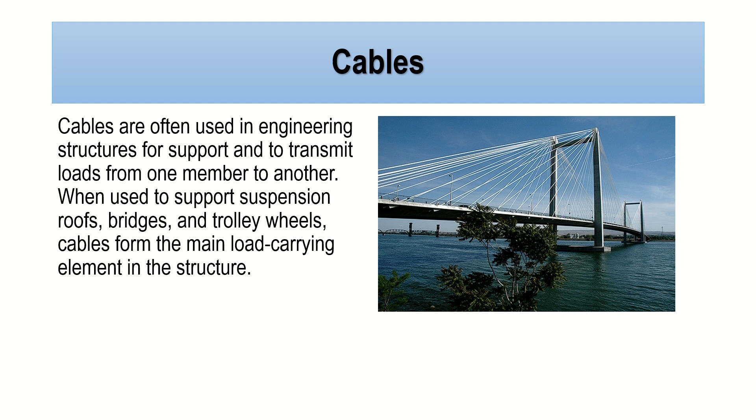So we have two types of cables. What are these two types? First, cable subjected to concentrated loading, and second, cable subjected to uniform loading. What's the difference between the two? As the name states, cable subjected to concentrated loading is subjected to concentrated forces.

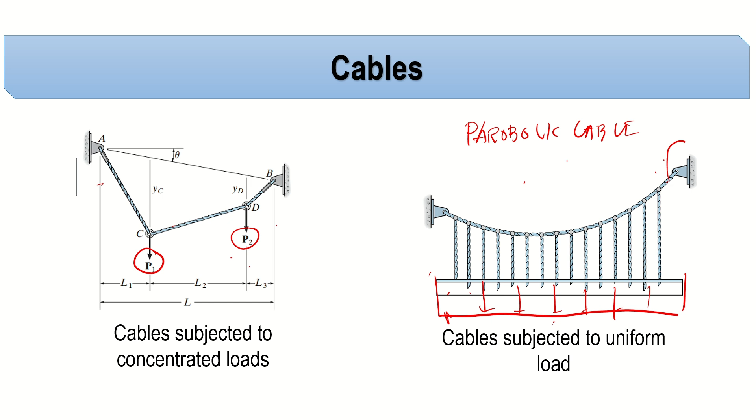But for this one, let's focus first on concentrated loading and uniform loading. By the way, before I move on, this type of cable is also called a parabolic cable. We'll discuss parabolic cable later in the continuity of our lecture.

Okay, so now what do we need to remember here? It says when L1, L2, and L3 and loads P1 and P2 are known, then the problem has 9 unknowns consisting of tension in each of the 3 segments, the 4 components of reaction A and B, and the sags YC and YD at the 2 points C and D.

So we're done with determinacy. Probably we now know what the unknowns are in the structure. For example, we are going to find what the unknowns are in this one. What are the unknowns here? We have a pin support, so there are two unknowns there because of X and Y - AY and AX. Here we have BY and BX, so there are also two unknowns there.

Aside from that, we also have unknowns for tension - tension at AC, tension at CD, and tension at BD. And aside from that, we also have another unknown, which is YC and YD. So that's 4 unknowns based on the reactions and 3 unknowns based on each segment of the cable, that would be 7 unknowns, right? Plus another 2 unknowns, which is the sag at each point, point C and point D, for a total of 9 unknowns.

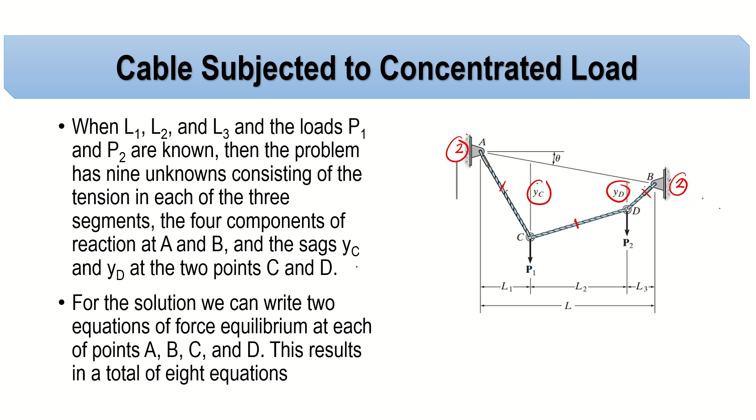And it says for the solution, we can write 2 equations of force equilibrium on each of the points A, B, C, and D. This results in a total of 8 equations. That means we can provide 2 equations at each joint of the cable.

Ano ba yung 2 equation na sinasabi niya? Yun yung summation forces X, summation forces Y. So kaya daw natin yan ma-produce in each joint. So ngayon, ilang joint ba meron tayo? A, C, D, B. 4 joints times 2, that's 8. E 9 yung unknowns natin.

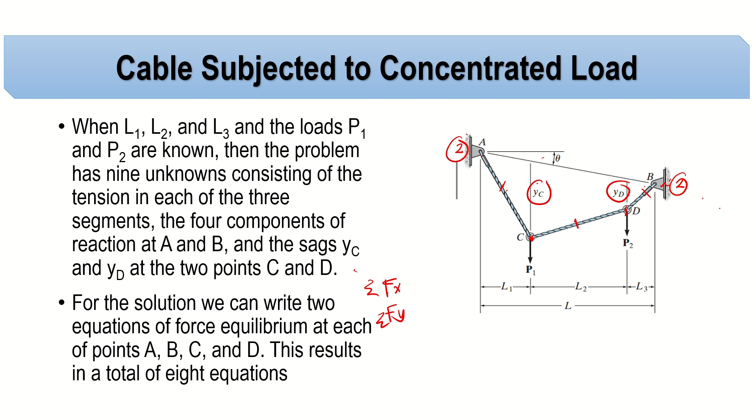Saan manggagaling yung isa pang equation that we need in order to solve this cable system? So sabi dito, to complete the solution, it will be necessary to know something about the geometry of the cable in order to obtain the necessary ninth equation. So hindi lang pala yung method of joint yung kailangan nating alamin dito. Pati yung geometry, actually most specifically yung trigonometry ng cable para ma-solve natin yung other unknowns, para makapag-compute tayo ng another equation.

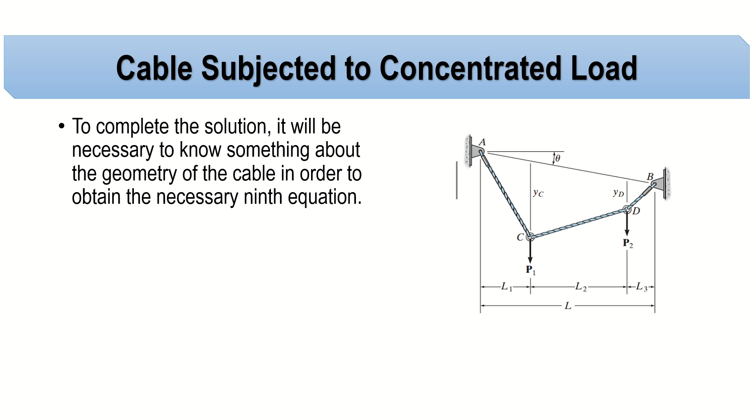Okay, in solving cables, we have key principles that we need to consider or memorize. Ano ba yung natin, key principle? So number 1, always subjected to tension. Yung cable, like I said earlier, cables are always subjected to tension. It doesn't have any capacity in compression at all.

Number 2, maximum tension occurs in the higher support. For example, we have a problem, tapos ito yung figure. Saan daw nag-o-occur yung maximum tension? Malamang yung tension sa AC. Bakit? Yan yung higher support compared to BD.

Ngayon, pag tinanong ka, what is the minimum tension in this cable system? Anong tension yung kukuhanin mo? You can either solve all of the tension in each of the cable segments or just choose the lower segment of the cable. So ano ba yung lower segment? That is tension sa CD. So yun yung lower tension.

Okay, so in number 3, the reaction at the support is equal to the value of the tension of the cable connected to that support. This is a very important concept because this helps us compute the unknowns in the cable system. Anong sabi dyan? Anong ibig sabihin yan?

So ibig sabihin yan, for a pin support, we have BY. Let's say this is BY, tapos we also have, baliktad, BX to, ito BY. So ngayon, yung BX, BY, may component daw yan, di ba? Ito, sabihin natin RB yan, o resultant sa B. So yung RB class is also equivalent to the tension sa DB. So ganun yung ibig sabihin ng key principle number 3: whatever the tension of the cable connected to the support is also equivalent to the reaction of the support.

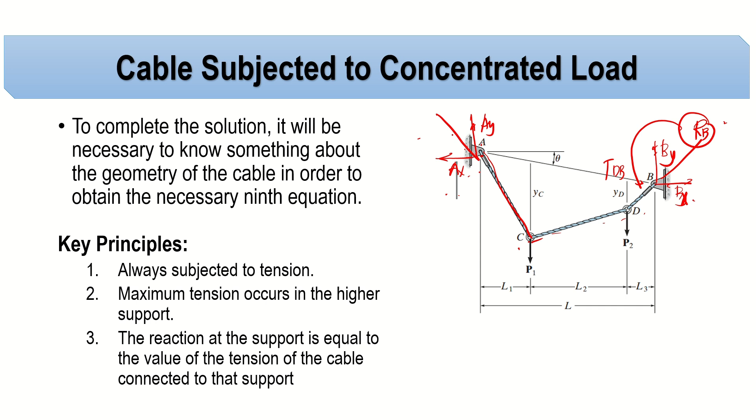So ano ibig sabihin yan? So for example, kung dito sa kabila, meron kang AX, meron ka ding AY, tapos naglagay ka ng resultant ng reaction sa A. So yung RA mo is also equivalent to the tension sa AC. Yun yung ibig sabihin ng statement number 3 sa key principles. You need to understand that, you need to memorize that concept in order to solve cable problems.

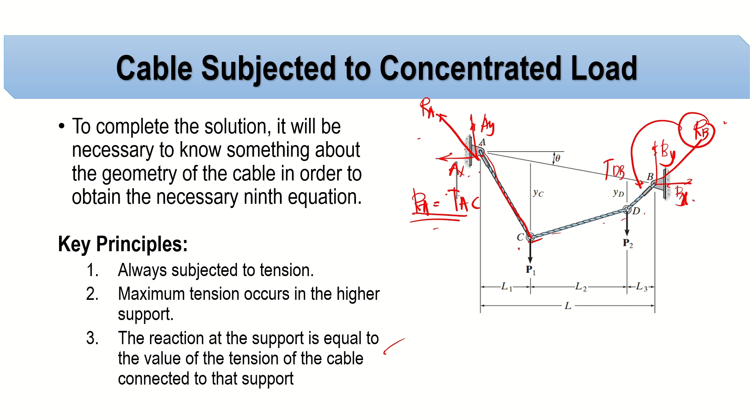Not necessarily, especially if you have unsymmetric parabolic cables. Kapag unsymmetric yan, hindi nangyayari yung minimum tension sa gitna. Nangyayari yung minimum tension sa vertex ng parabola. Ano ba yung vertex ng parabola? Yung highest point, or in our case, the lowest point of the parabola. Okay, so ngayon, magkaiba yan na hindi to center, kasi unsymmetric yung parabola natin. Ngayon, ano naman yung maximum tension? Yung maximum tension, of course, happens in the higher support also.

So ngayon, yung pangalawa naman na key principles na kailangan natin tandaan is horizontal component of any reaction at the support or any segment of the cable is constant and is equal to the minimum tension. So of course, this is a parabolic cable.

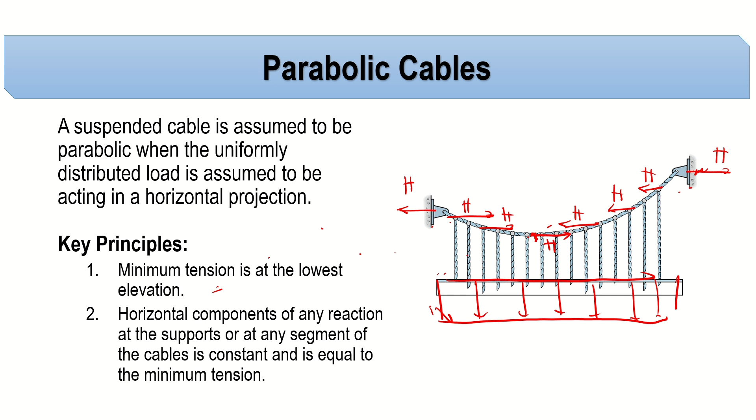So siguro, let's try to solve some problems, no? Let me change first the screen para makapag-solve tayo.

Okay, so let's try to answer problem number 1. So for the given cable below, determine the following. Letter A, tension in each segment of the cable, and then letter B, the value of beta 2 and beta 3 provided that the value for beta 1 is 40 degrees.

Unang kailangan natin gawin is tingnan natin kung may masosolve ba tayo kapag nag-method of joints tayo. Kasi yun yung kaya natin gawin dito. Kapag nag-method of joints tayo, let's see if we take method of joint and we consider joint C, ano ba yung mga unknown natin? Remember, kapag method of joints, kailangan dalawa lang yung unknown. It can be either the segment of the cable itself or the angle.

So let's try. Pag nag-joint C tayo, ano ba yung unknown natin? That is tension sa CD, tension sa CB, tsaka beta 3. Remember, beta 3 is unknown also. So we cannot solve this one.

So ngayon, kapag naman nag-method of joint tayo sa B, ano ba yung unknown natin? So we have AB, BC, tsaka beta 2. O ngayon, tatlo yung unknown doon, tatlo yung unknown din dito. So definitely, we cannot solve these two joint.

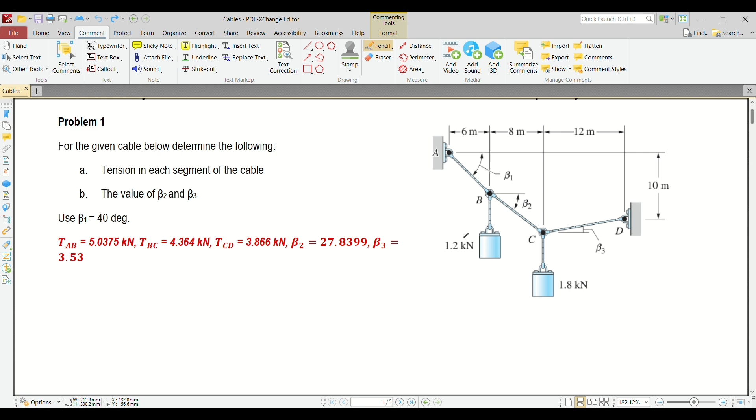So anong pwede natin gawin? Pwede natin gawin is what I discussed based on key principle number 3. Ano ba yung key principle number 3? Sabi natin, the tension of the cable connected to the support is equal to the reaction of that support. So ano ba ibig sabihin nun?

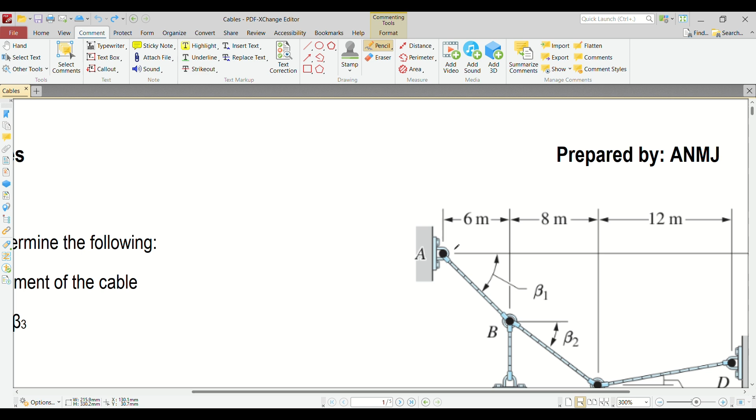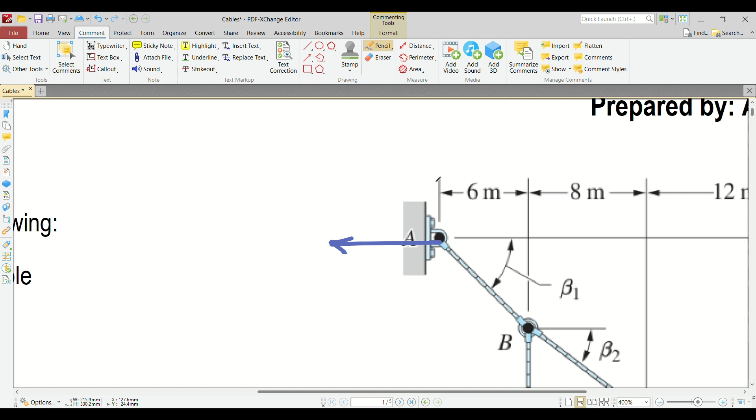So ngayon, ito siguro, lagyan natin ng horizontal and vertical components. Now let's say this is the horizontal component. Tapos this is the vertical component. Ayusin ko lang ha.

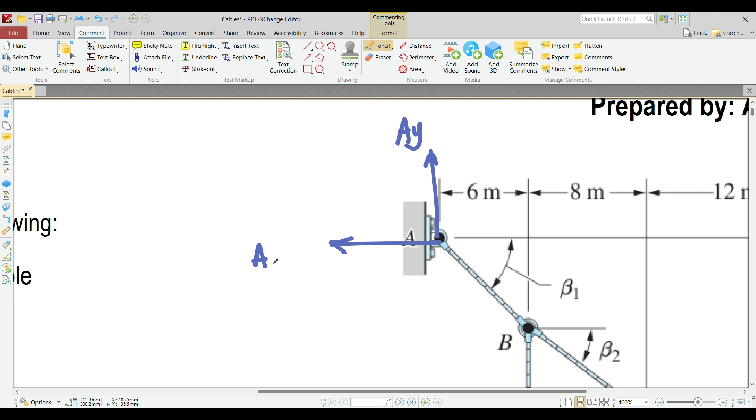Horizontal component and then vertical component. So ngayon, ito tatawagin natin siguro na AY. Ito tawagin natin na AX. Remember, equal yung AY natin, no? Sa ano? Yung horizontal component din or yung vertical component din ng tension sa AB. Remember, yung beta 1 natin, it says in the problem na 40 degrees ito. So yung AY natin is also equivalent to ano, 'di ba meron ka ditong tension din?

So ilagay ko lang ha, nakaslant. Ayusin ko lang yung pagkaslant. Yan. So ito RA. So yung RA natin is also equivalent to TAB. 'Di ba? Sabi natin. So itong AY is also equivalent to TAB. Ano ba 'yan? Kung 40 ito, edi malamang 40 din ito. Based on trigonometry, no?

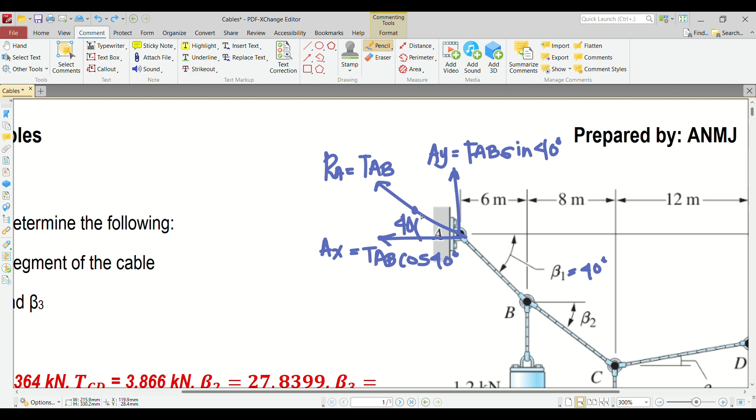Oh, this is 40 degrees. If that is 40 degrees, so this is TAB sine 40 degrees. Okay? So ngayon yung AX naman is TAB cosine 40 degrees. So paano naging sine to? Paano naging cosine to? 'Di ba ang sine is opposite over hypotenuse. Yung hypotenuse mo TAB, yung opposite mo ito, nilipat ko lang sa kabila. No, pwede naman 'yon. So ngayon bakit naging cosine ito? 'Di ba cosine is ka adjacent over hypotenuse. Yung adjacent mo ito, so ang hypotenuse mo itong TAB. So TAB cosine 40. Okay?

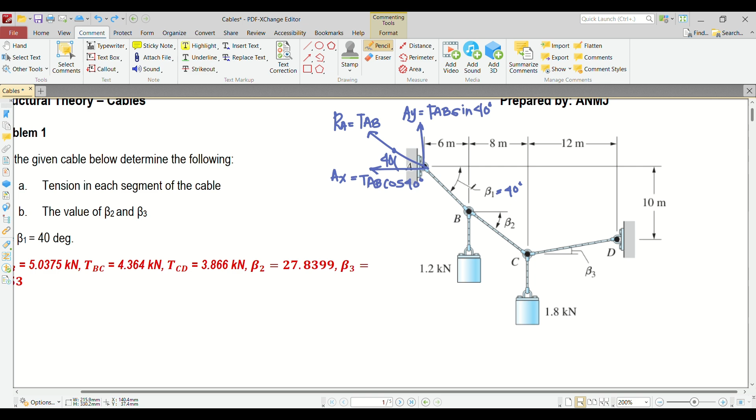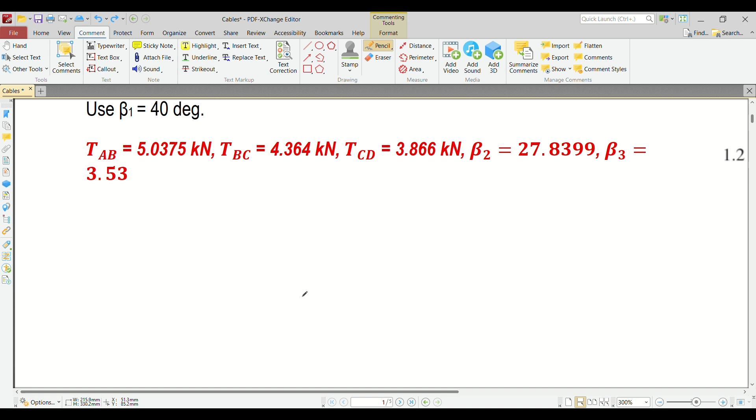So after that, we can take now the moment at point D. So using the moment at point D, we can actually calculate the tension at AB. So paano 'yan? So ngayon, summation, dito na lang. Summation, moment at D is equivalent to 0, clockwise, positive. So ngayon, ano yung isa-summation natin? So we have TAB sine 40.

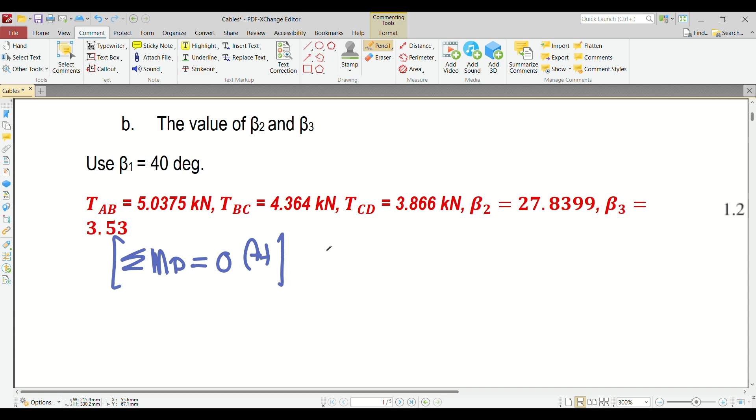Ngayon, ano yung distance niyan? Perpendicular distance kung saan ka nagmo-moment. Dito ka nagmo-moment sa D. Ano yung perpendicular distance? 12 plus 8, that is 20, plus 6, that is 26, no? So, TAB sine 40 times 26.

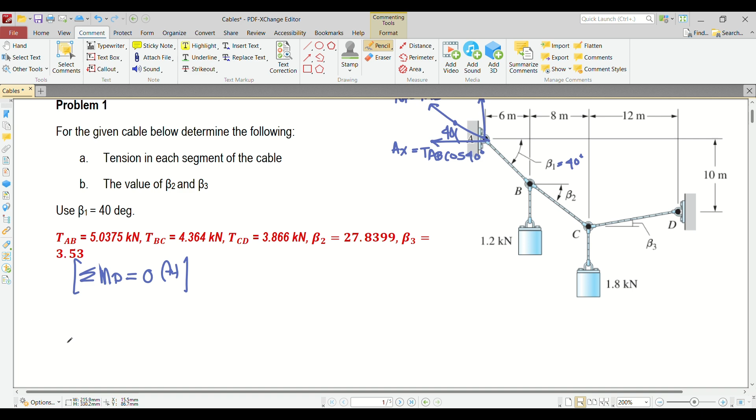26. So that's positive because the moment of that based on point D is clockwise. Now, the TAB, that is moving counterclockwise from point D, so that is negative.

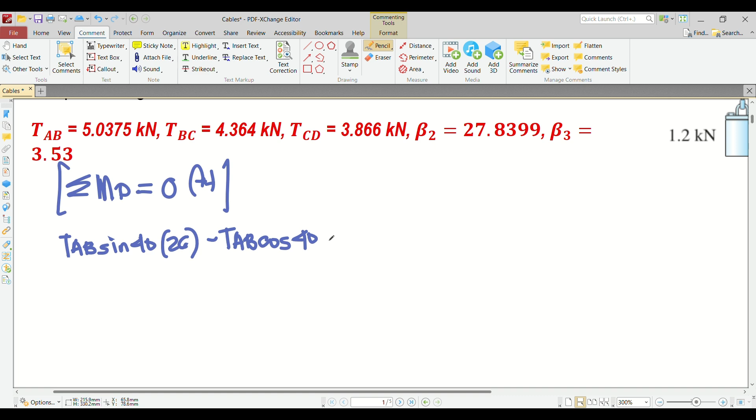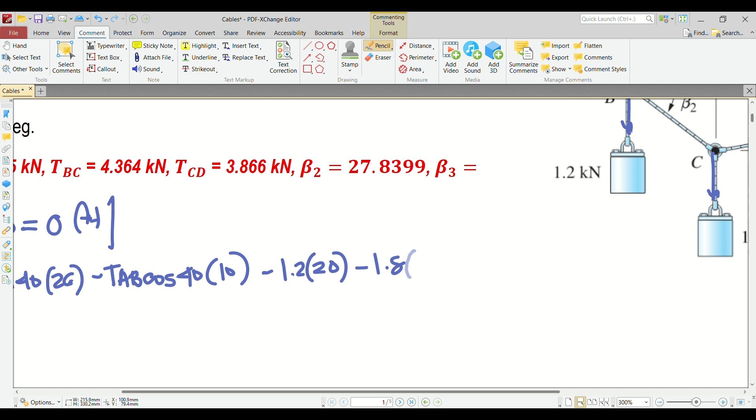Our loadings are based on gravity. There's also a cable there, acting downward, which produces a counterclockwise moment from point D. So the 1.2 has a distance of 20, the 1.8 has a distance of 12. Both are minus. So minus 1.2 times 20 minus 1.8 times 12.

Equivalent to 0. So let's try. Let me just get my calculator. So x... wait.

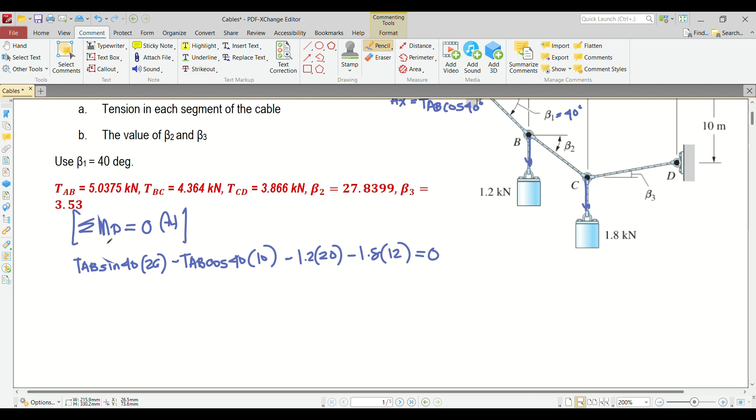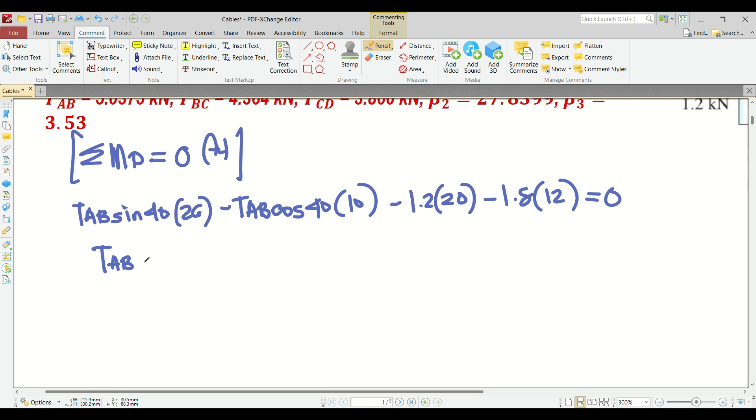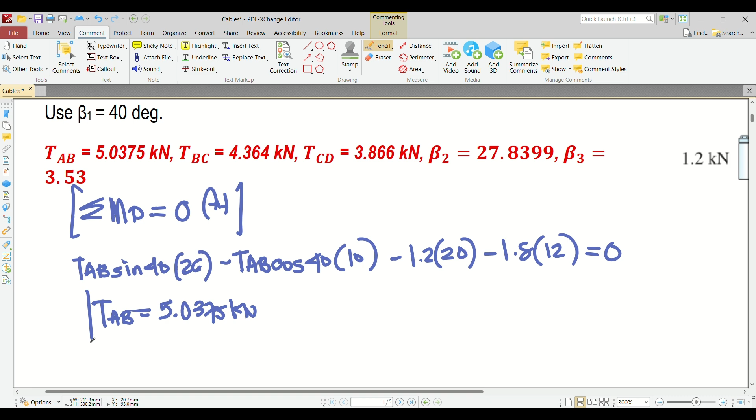Okay, the answer I got is 5.0375, which is correct based on the answer key here. So the answer, TAB is equivalent to 5.1, or 5.0375 kilo Newton. So this is your answer for the first tension in the first segment.

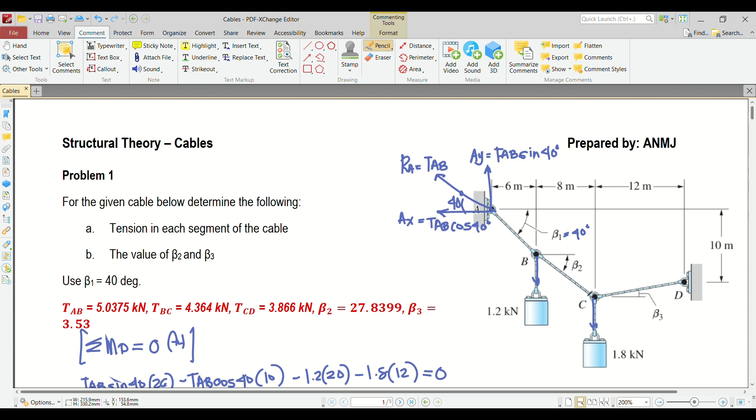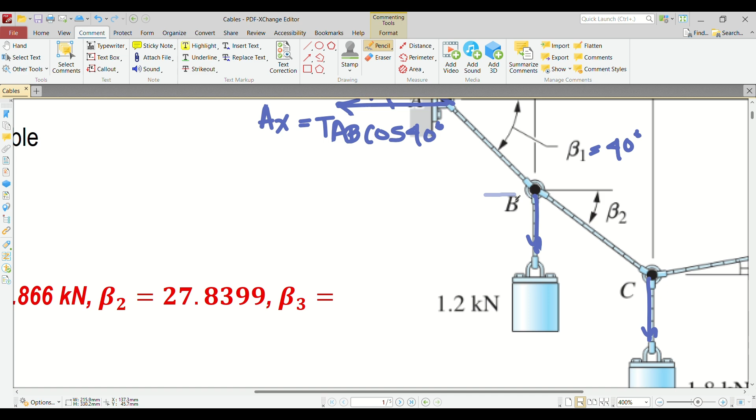Okay, so after that, since we already know this one, we can now solve for TBC. How? We do joint B because we only have two unknowns. What are the unknowns? Beta 2 and the tension at BC. Remember, if this is 40, when you put a horizontal here, this is also 40.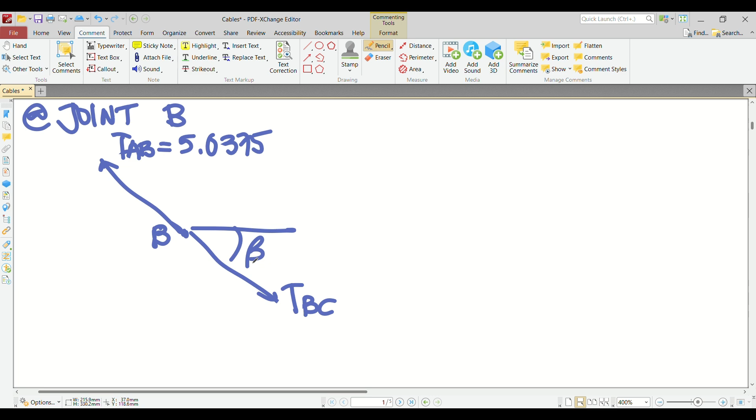Let's keep it straight. So this is TAB, which has a value of 5.0375. Then this is B. Then this is TBC. Okay, let's put the angles. So this is beta 2. Right? Or beta 3? Beta 2. And this one, we do have an angle for this. Let's erase this first. This is 40 degrees. So this is joint B.

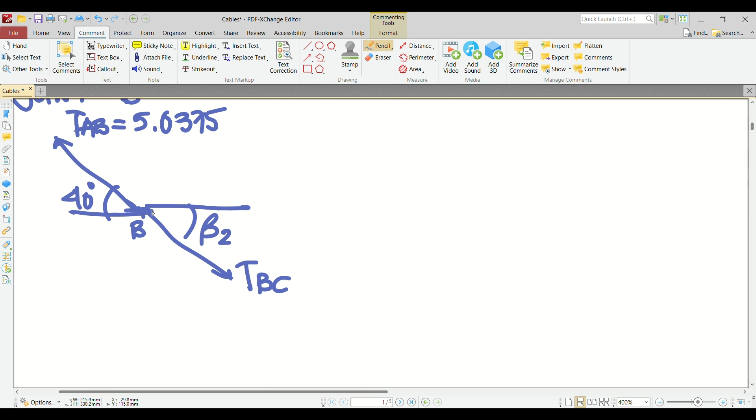Okay, so now how do we do this? We can do summation of forces, horizontal then vertical, since we only have two unknowns left. Horizontal first. So summation forces x equals 0, rightward positive. So what happens in this one?

We have TBC first. TBC is positive because it's pointing to the right. So this is cosine beta 2, minus 5.0375 courtesy of TAB, and then this is cosine 40, equals 0. Okay, so let's isolate cosine or TBC.

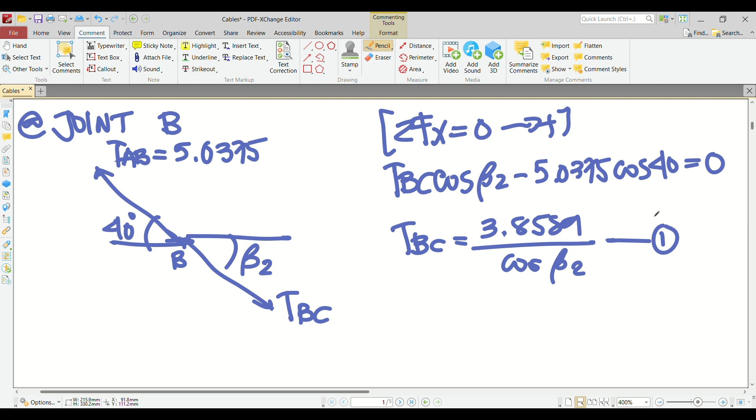Then divided by cosine beta 2. So we can't solve that yet. Let's call this equation 1. Okay, after that, let's do summation of forces, vertical.

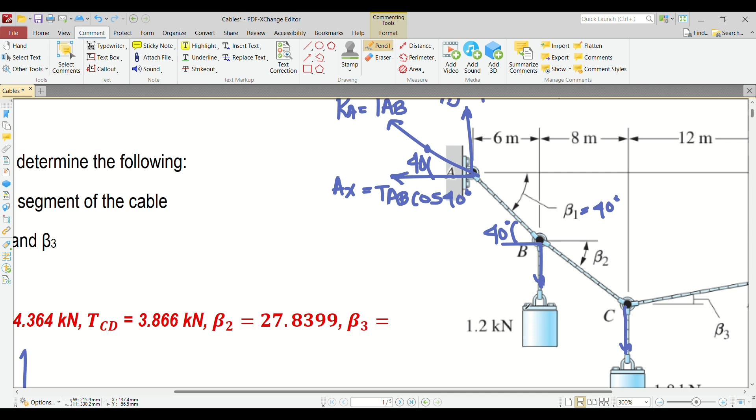Summation forces vertical equals 0, upward positive. So what happens? We have TAB, or TBC again, TBC sine beta 2, and then plus, this is 5.0375 sine 40. Don't forget, we still have a concentrated loading here, which is 1.2. If you don't include that, you'll make a mistake.

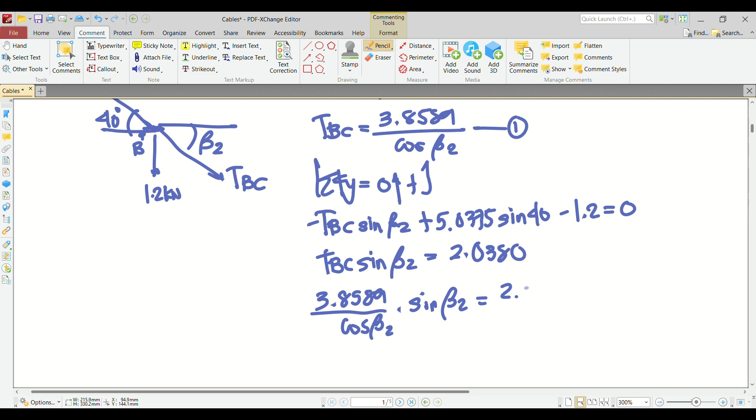Okay, so in trigonometry class, sine over cosine is equivalent to tangent. Then let's move this to the other side. So what happens to our equation? It becomes tangent beta 2 is equivalent to 2.0380 all over 3.8589.

So now, using this, how can you calculate the angle? Arctangent, right? So beta 2 is equivalent to arctangent, or tangent negative 1, of 2.038 over 3.8589. So what is the value of beta 2?

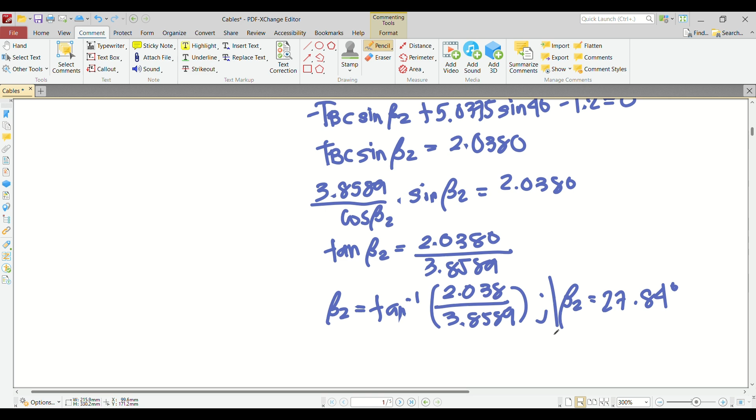So, based on my calculator, the value of beta 2 is 27.84 degrees. Okay, let's see if we are correct. So 27.84, tama naman, 8399.

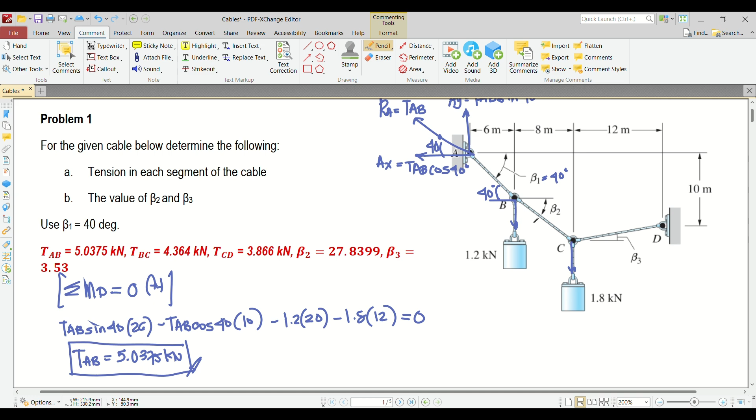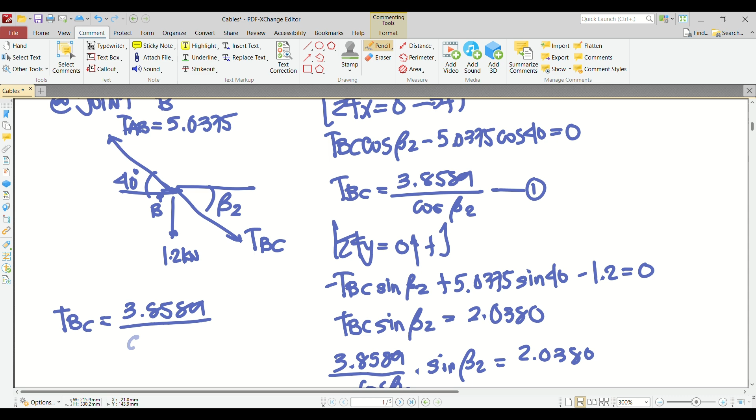After that, siguro method of joints pa rin tayo kasi hindi pa natin nakukuha si BC. Actually, hindi na natin kailangan kasi we can solve for BC in either of the two equations that we generate. Gamitin na lang natin yung first equation. So TBC is equivalent to 3.8589 over cosine 27.84. Ilan kaya yung value ni TBC?

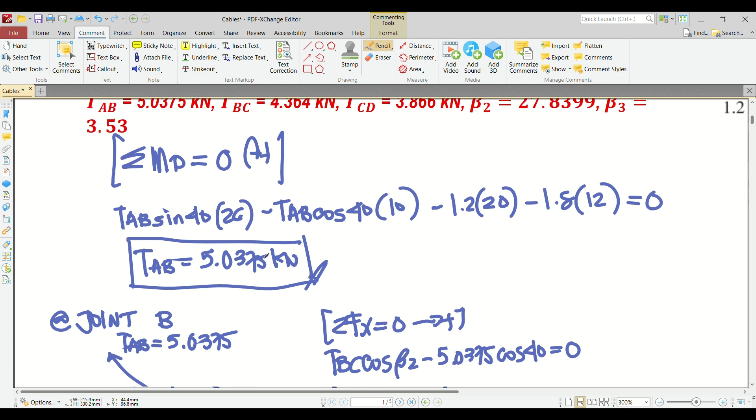4.364 kilonewton. Okay, let's see if we're correct. 4.364 kilonewton, so tama naman tayo.

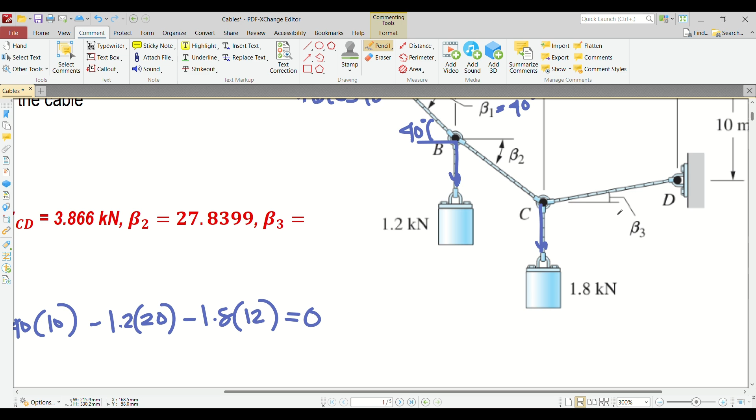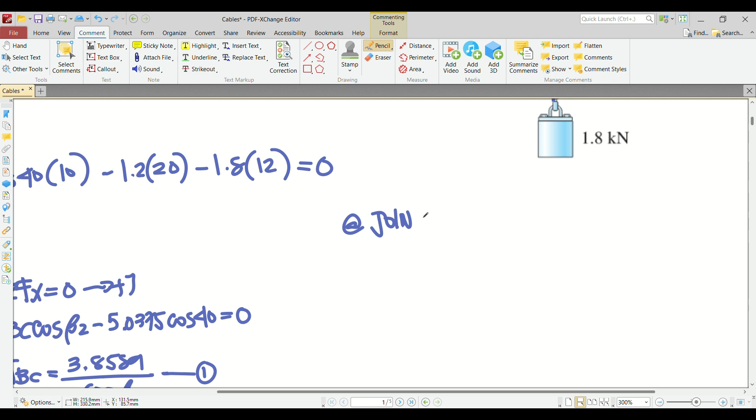After that, siguro mag-joint C na tayo para ma-solve natin. Since we already got the value for beta 2, kulang na lang tayo ng CD tsaka beta 3. Let's try to solve that. So at joint C, anong makikita natin?

So we have here pag ganito, tsaka pag ganito. This is 1.8 kilonewton, this is point C. Tapos ito, TBC, which is equivalent to 4.364. And then we do have an angle right here, this is 27. Tapos, meron tayong angle na unknown dito, which is beta 3. And then this one is TCD. Again, away from the point palagi.

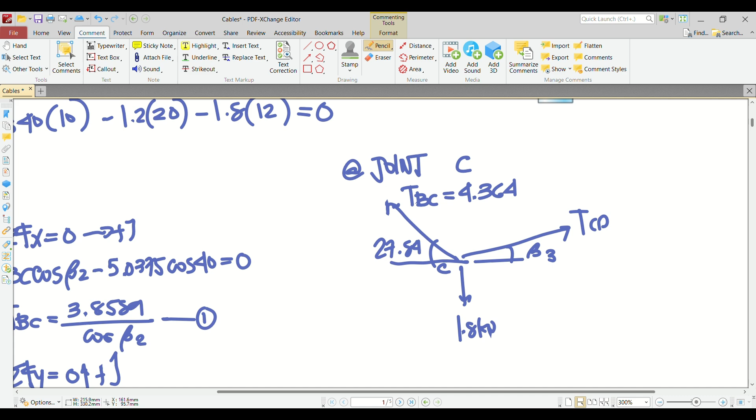Pwede na tayo mag-summation forces horizontal. Summation forces sa X equals 0, papunta sa right positive. So we have TCD cosine beta 3 minus 4.364 cosine 27.84 equal 0.

Ilipat natin sa kabila, so TCD is equivalent to, evaluate muna natin to, 4.364 cosine 27.84, that is 3.8589. Tapos divide natin ng cosine beta 3. So we cannot solve anything there, that would be our equation number 1 again.

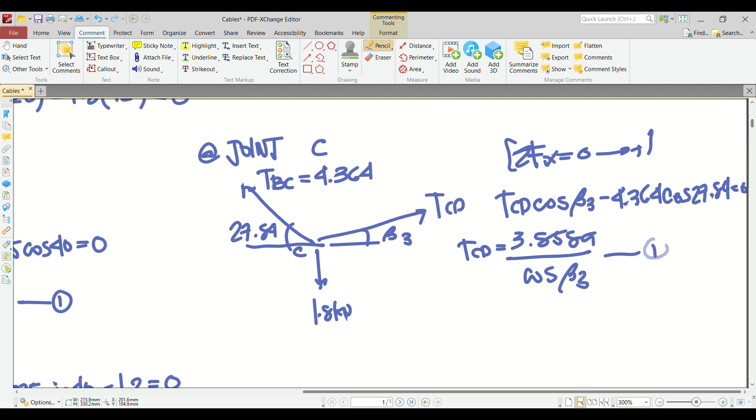After that, summation forces sa y equals 0, upward positive. So this will be TBC, 4.364 sine 27.84 tapos plus TCD sine beta 3 and then minus 1.8 equals 0.

Ayusin natin, siguro unahin natin si TCD. So TCD is equivalent to, evaluate natin, lipat natin sa kabila: 4.364 sine 27.84 minus 1.8, that is 0.238. Pag nilipat sa kabila, magiging negative 0.238.

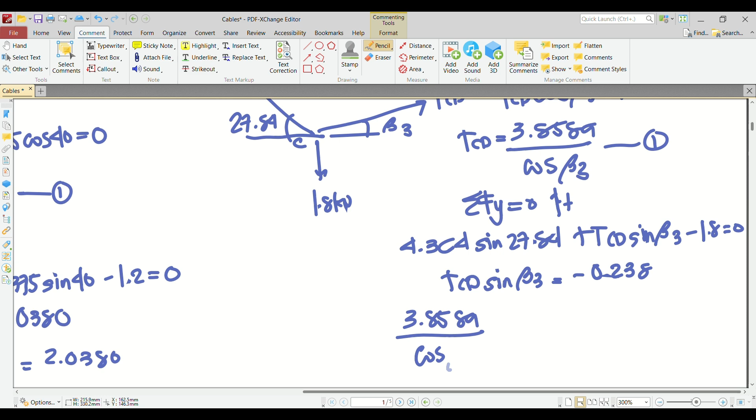Ngayon, divided by sine, kulang pa yung sine natin dito. Ulit, so this is sine beta 3 equals negative 0.238. Remember, we already solved the value for TCD na merong cosine, so pwede natin i-plug in dito. So ano mangyayari? 3.8589 over cosine beta 3 times sine beta 3 is equivalent to negative 0.238.

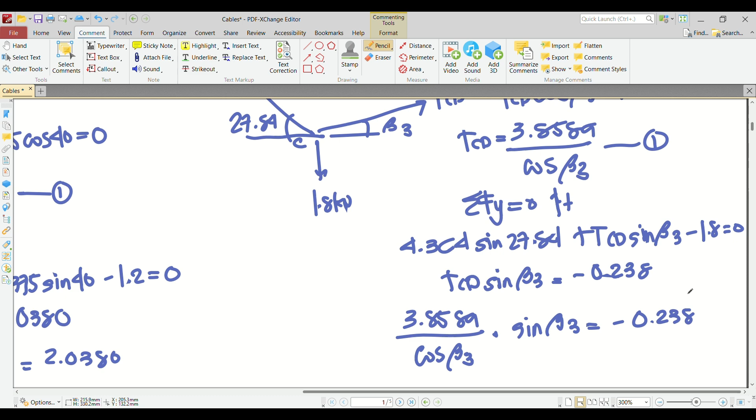After that, again, sine over cosine is tangent. So tangent beta 3 is equivalent to 0.238 over 3.8589. Now guys, for solving angles, you can disregard the negative sign, pwede natin disregard yan. So beta 3 is equivalent to arctangent, or tangent negative 1, of 0.238 over 3.8589.

So what is the answer for our beta 3? Shift tan 0.238 over 3.8589. So ang nakuha natin is 3.53 degrees. So this is the answer for beta 3.

Let's see if we're correct. Ang answer naman is 3.53. So let's figure out what is the value for TCD.

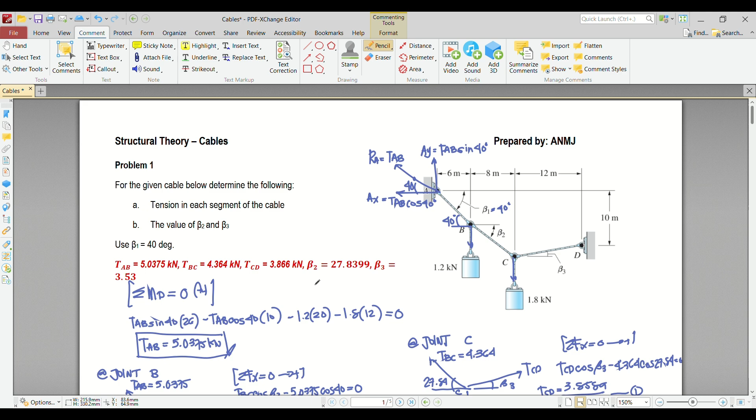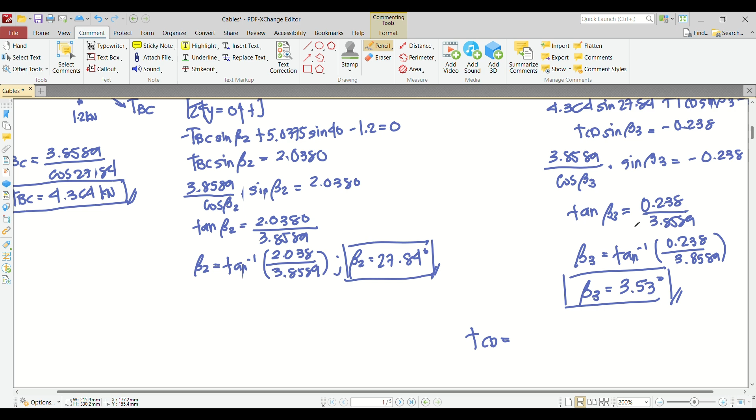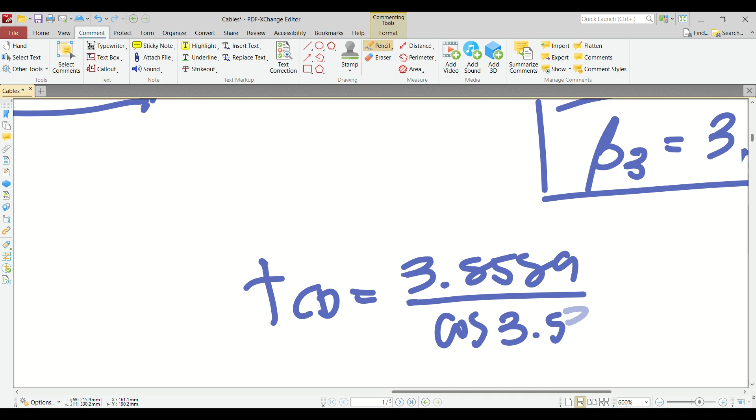TCD is equivalent to, copy na lang natin yung isa. Ano ba dito? Ito na lang. So 3.8589 over cosine 3.53. Ilan yung value ni TCD?

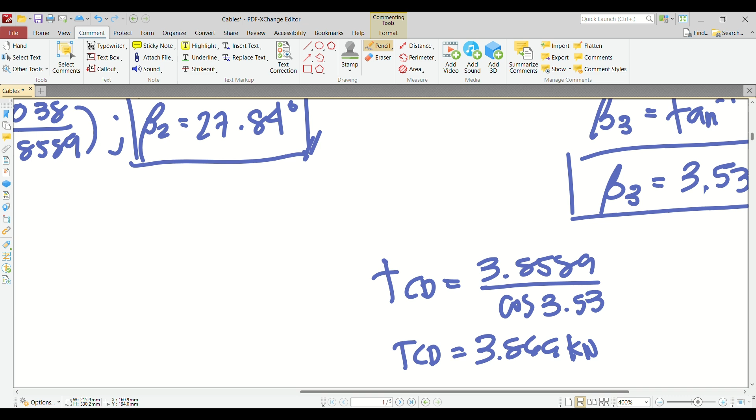3.866 kilonewton. So this is the answer for the tension in cable CD. Let's see if we're correct. 3.866, so tama naman. Okay.

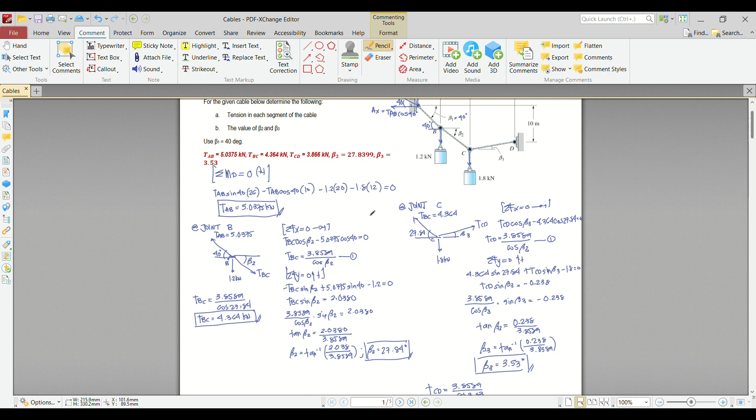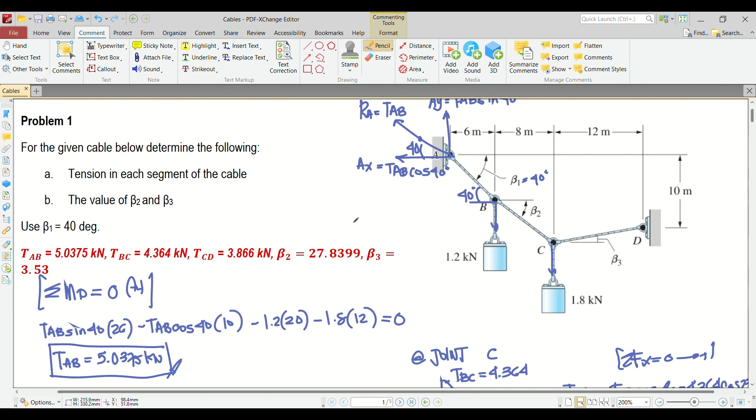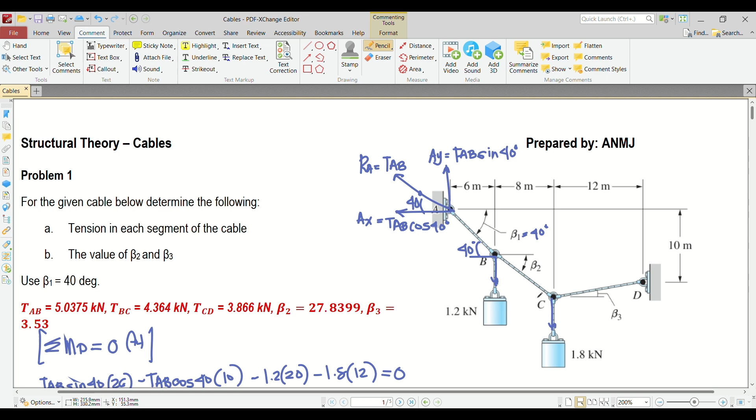So this is the answer for problem number 1. Again, first thing you need to do is to find out whether you can solve each of the joints. Ngayon, yung joint natin, hindi natin ma-solve, kaya nag-proceed tayo dun sa reaction. Again, yung reaction is equivalent to the tension in the cable connected to that support, kaya nagawa natin so nakapag-moment tayo. And then eventually, we use method of joint since we already got the value for one tension in joint B. So tuloy-tuloy na, hanggang sa makuha na natin lahat ng tension as well as the angle. So this is problem number 1.